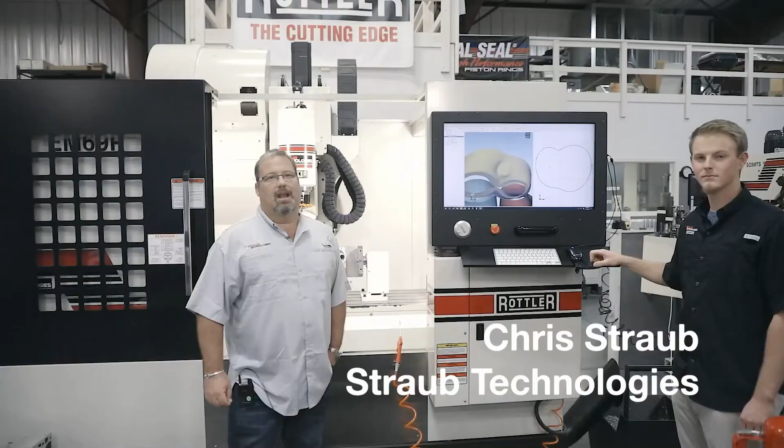Hi, I'm Chris Straub with Straub Technologies, and I'm here with Jaden McCurry. Jaden operates our EM69H Rottler CNC center that we use for porting. At Straub Technologies, we had come to a point where we needed something that could replicate the development work that we had been doing as far as cylinder heads. Asking a few questions of people, what CNC cell we needed to buy for CNC porting, one company kept coming up, and that was Rottler. One reason is because Rottler is a self-contained digitizing and machining center. Not only can we use the Rottler to do the machine work, but it can also digitize the part that we want to replicate in the machine.

Straub Technologies grew from my garage. Never thought that I would be doing anything like this. I've been in the industry for 25 years, but people now with the DIY mentality, they want to be that Grumpy Jenkins, that Keith Dorton type person and build their own motor. So with the Rottler, being able to produce over and over again the same quality part was important to me. I need to provide something for my customers, and that's what the Rottler machine allows us to do.

When I bought the Rottler, they came to me, and when in talks they said, Chris, you don't have to know speeds and feeds and all this stuff. The machine knows that. As long as you can work Windows, then you can become a CNC operator as far as doing port work and stuff.

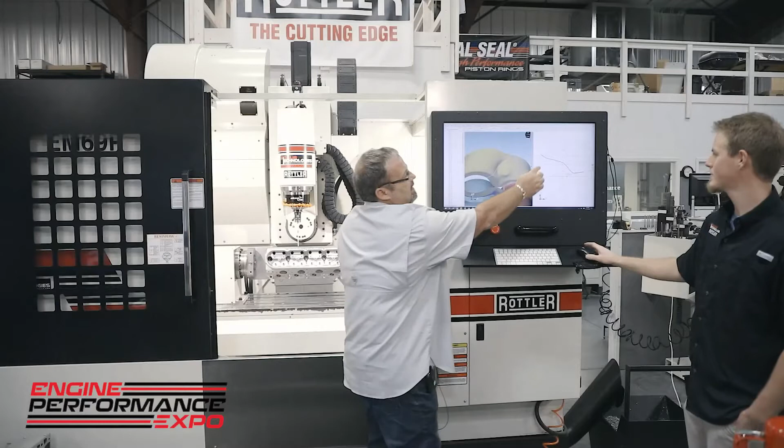So one thing that we do enjoy about the machine is the manipulation of any of the data points that Jaden is able to capture using the Renishaw probe on the cylinder head, easily seen here. And all of these lines represent captured data in the combustion chambers. Each one of these is where the probe has touched, so it's mapped out this combustion chamber of this cylinder head. And Jaden can then go into his computer system in his office, and anything that he needs to smooth or reshape is easily done.

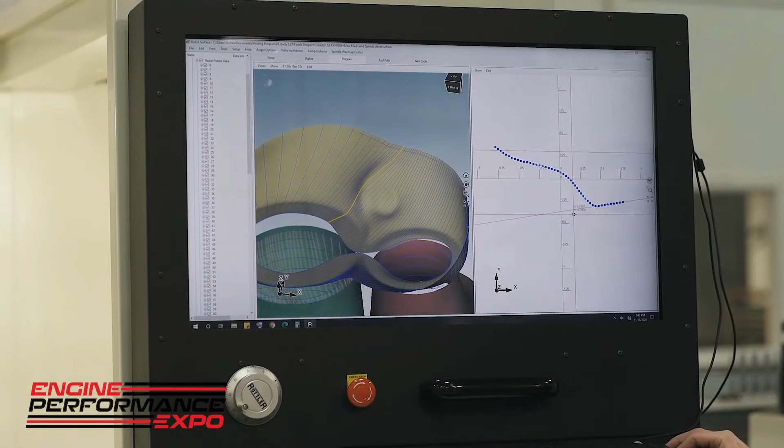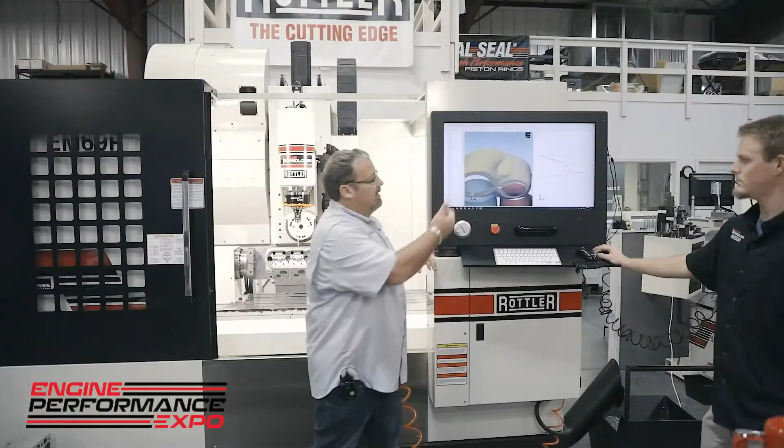That's one advantage the Rottler has over multiple machines, its ability to capture data so fast. You'll hear about people that have digitized over the years, and it might take them a week to 2 weeks to do an intake port, an exhaust port, and a combustion chamber. Jaden's been able to do this in a matter of a day. So what's important to me is I don't have to have as many people, but can produce as many parts as some other much higher volume shops. So for me, as a small business owner in the automotive performance industry, Rottler was my choice.

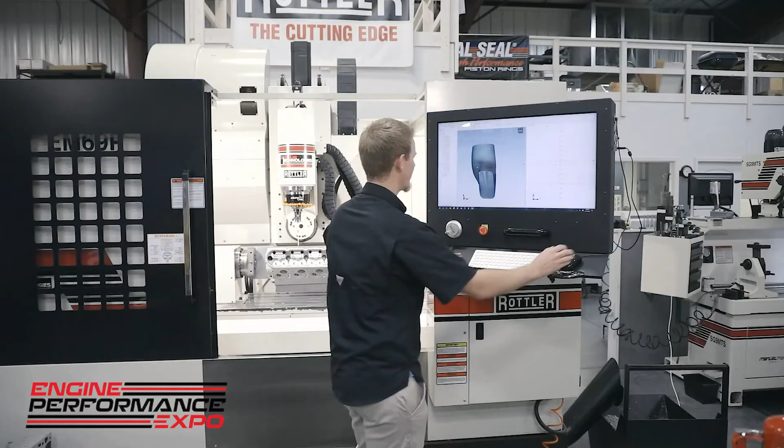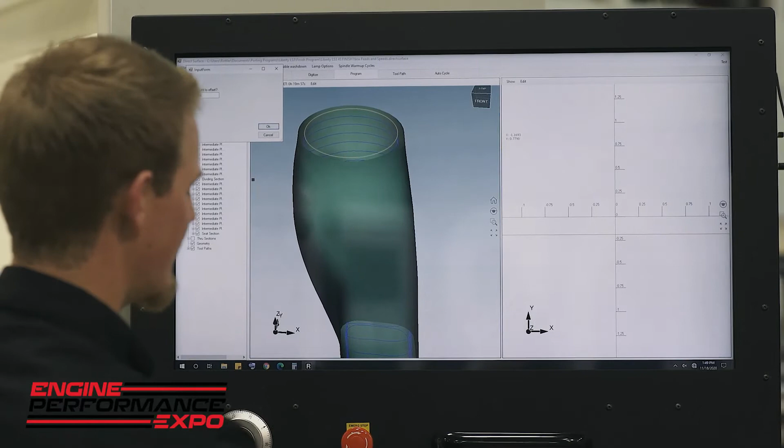Yeah, so this is a port that has already been digitized, and it's already got the through section, so it has its solid surface. If I want to go through and change, say, the plane that's right here on the seat surface, if I want to shrink this entire section, it's as simple as right-clicking on the plane. You can go to section offset. If I want to offset it, say, 250 thousandths, just so you can see what it does. You can see it blew that entire plane out just that quick. So every little change that you make on this thing, you can see all the results just about as quickly as you want to do it.

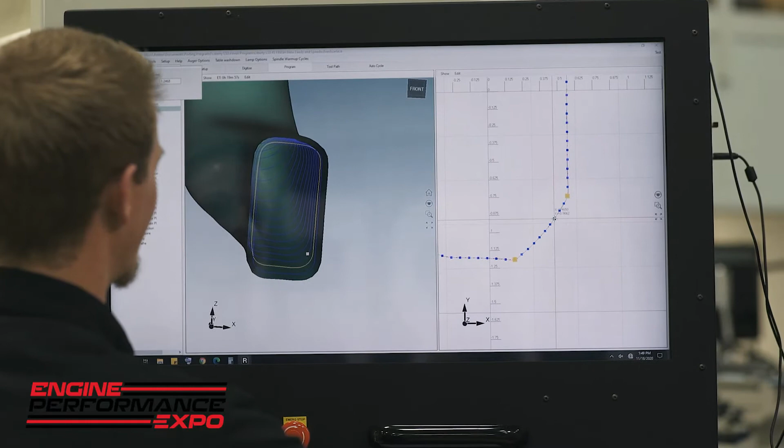So you want to change the radius in the corner of this plane. Click that, you can change your arc. So you just make it a straight line or whatever. And you can see it right there immediately as you do it. So it gives a really good representation as you go through if you want to smooth things. There's really not a lot of waiting to get things happy like you want it to.

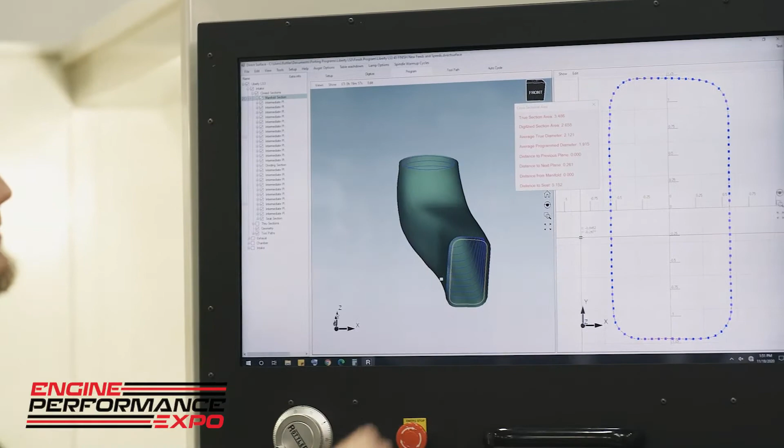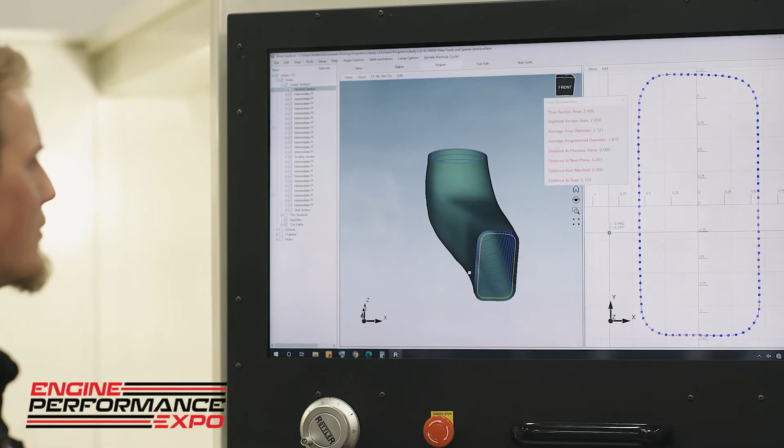But with each plane that you go through and digitize, which is what all these sections are with the data points, it keeps record of the sizes, so it's got its own little graph, like a little representation you can keep track of, and you can check out your cross-sectional areas. So you pull the list up, so this right here is the manifold section, the first section on the manifold side for the intake port. It gives you your true section area, digitized section area, average true diameters, program diameters. It gives you the distance between the planes. It'll tell you how far you are from this manifold plane.

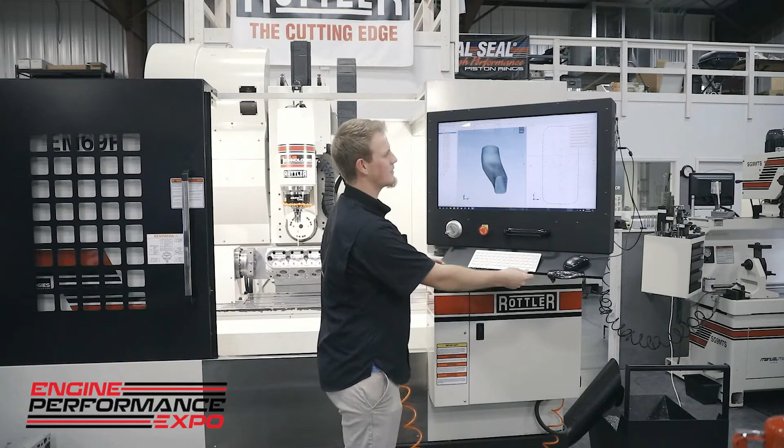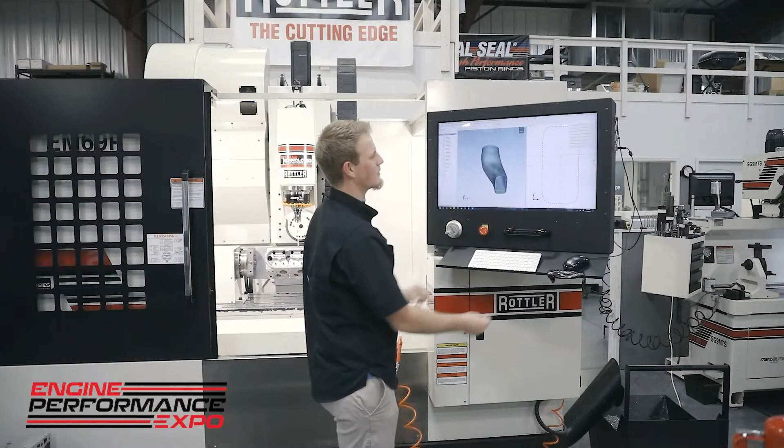So I'm starting right here at the manifold section. So right there it says distance to the next plane: you got 261 thousandths. If I go to the next one, it shows distance from the manifold, so it shows that we moved 261 thousandths. So if you pick a random plane throughout your port, it can give you an idea of a measurement, how far into that port you actually are.

Honestly, my favorite feature about this machine is after you've created your ports and you've got your tool paths created, it'll show you where your tool has run.

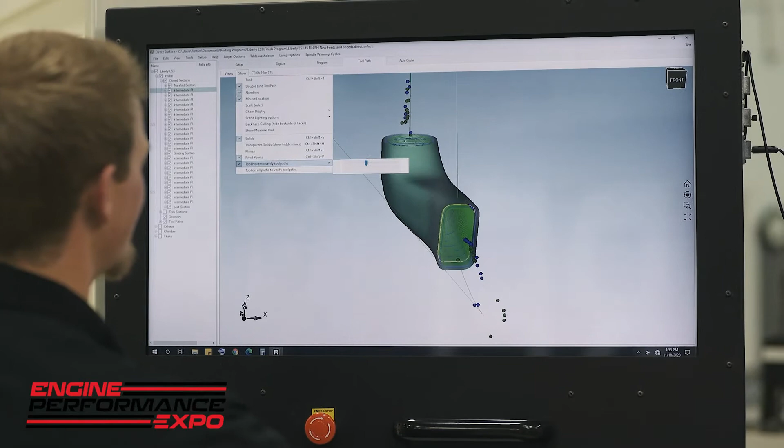And in previous updates, you can hover your tool and it'll show a rendering of it pivoting on these pivot points as it goes through the port. And with the more recent updates, you actually have a function and it will show you every spot that that tool moves throughout that port.

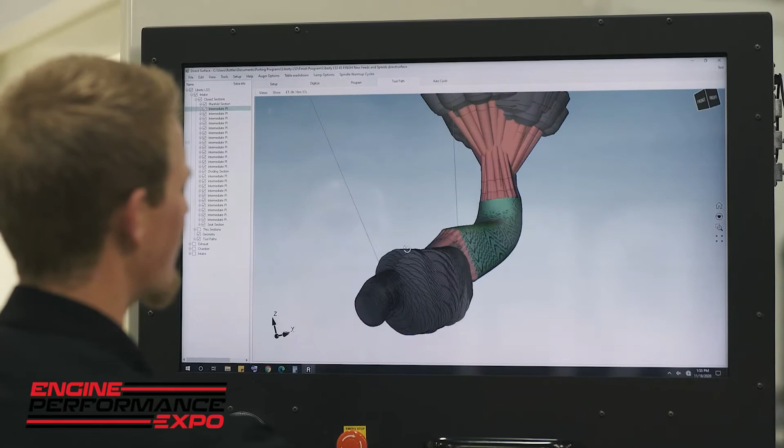And it's really nice because if you have long ports or ports that are making really sharp turns, if that tool is going to get down and try to rotate where it would actually dig into the opening surface, it'll show you that the tool will be poking through the side of the port. So instead of having to hover back and forth and hope that you catch it with your eye, or running it and just being really careful, you're almost guaranteed that you're not going to hurt nothing with that feature.

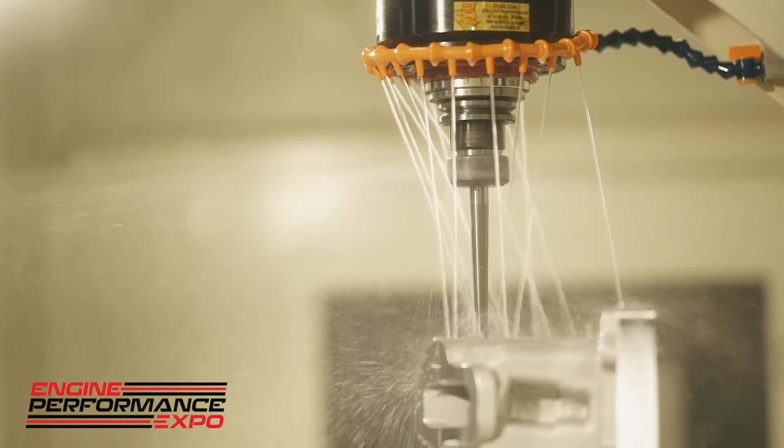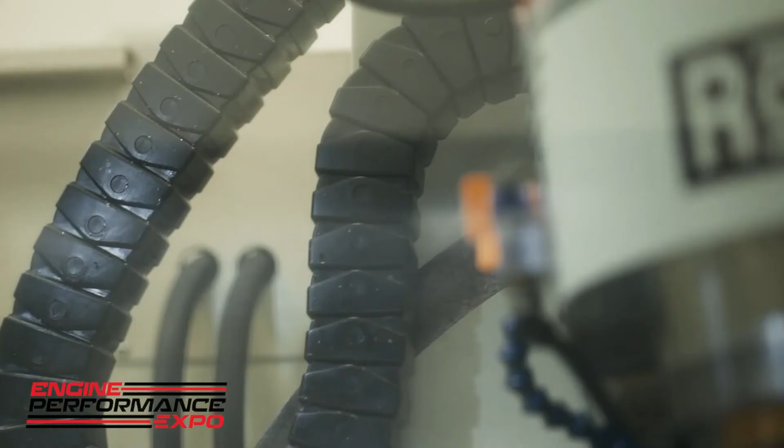Standing in front of our Rottler EM69H, it's a cylinder head porting machine. Years ago, we were all kind of talking about possibly purchasing a machine, because we were porting a lot of cylinder heads by hand, and it was taking just way too much time. Literally 8, 10, 12 hours or more for import heads and V8s. We do a lot of imports, a lot of domestic stuff.

So we looked at a bunch of different machines from a lot of different manufacturers. The Rottler basically stood out in front because it's an all-in-one type of machine. So we can hand port a cylinder head, get it on the flow bench, make little changes or whatever we want to do, get the head in the machine, actually digitize it in the machine, actually do all the modeling, solid modeling, look at how the port design looks, create all the tool paths, run little tool paths, make changes on the fly if you want, and actually port the head in the machine. It doesn't have to come in and out, in and out.

You know, stuff that used to take us, like I said, 8, 10, 12, 14 hours. Now with this machine, the CNC cycles are generally 2, 3, maybe 4 hours at the most. So you're definitely saving a lot of time.

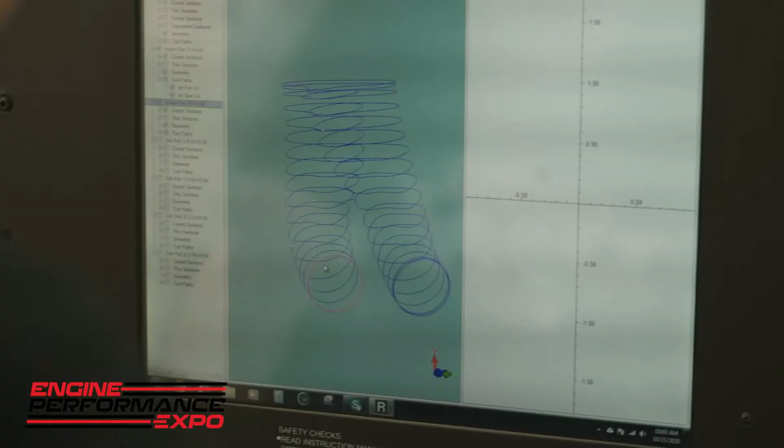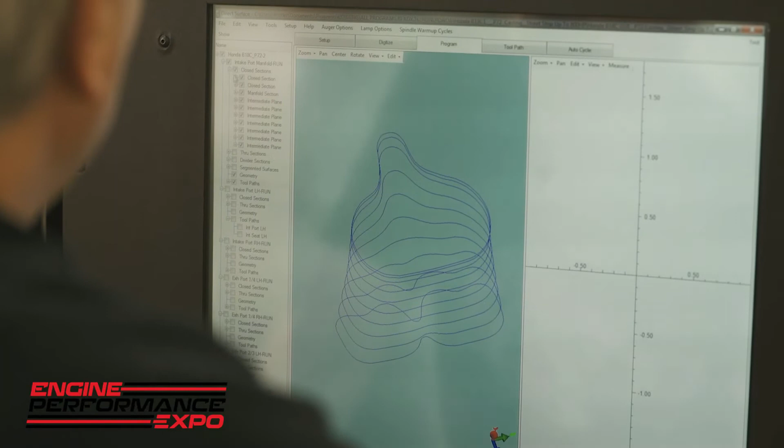Yeah, so basically with the Rottler software, after the head has been ported, you obviously put it in the machine and we start the digitizing process. The probe will come down and actually digitize each of these little pie slices, as we call them. So it's making a digital copy of what you hand ported.

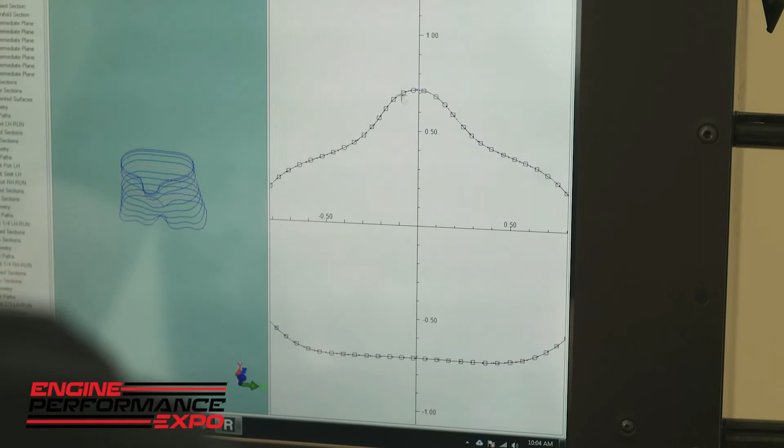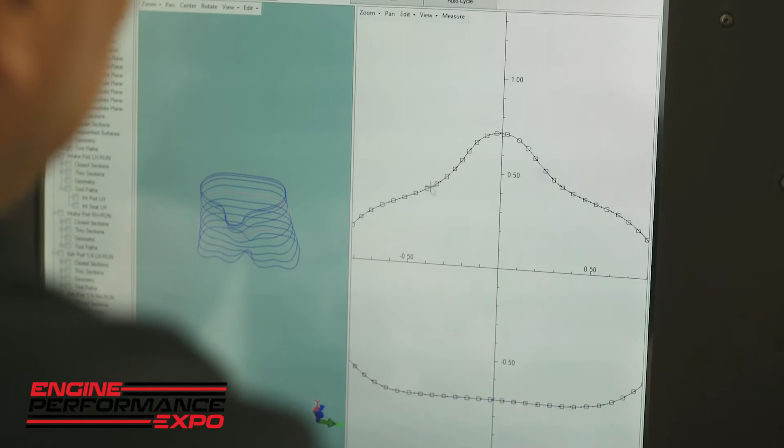And once these are all digitized, you can actually go through, and if you want to edit the shape of any of these, you physically can just grab any of these lines and points and move them. So if you don't like the way a curve is, or maybe the probe hit it just a little funny, or your port wasn't as perfect as you thought it was, you can edit it there. And then they have smoothing operations that will help smooth out the port and line everything up a little better for you. And it's all done on the machine.

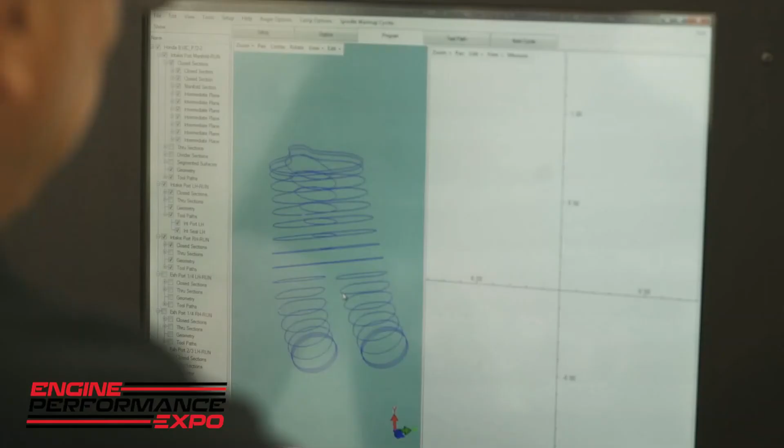And once you're done with that and you kind of like what you see, then you can actually start creating the tool paths. After it's digitized, if you have to make any changes, you can make your changes. You can click on any of these points. You can move stuff around. It has smoothing operations to blend the stuff a little better. Sometimes when you hand port, you think you have it perfect, but you don't.

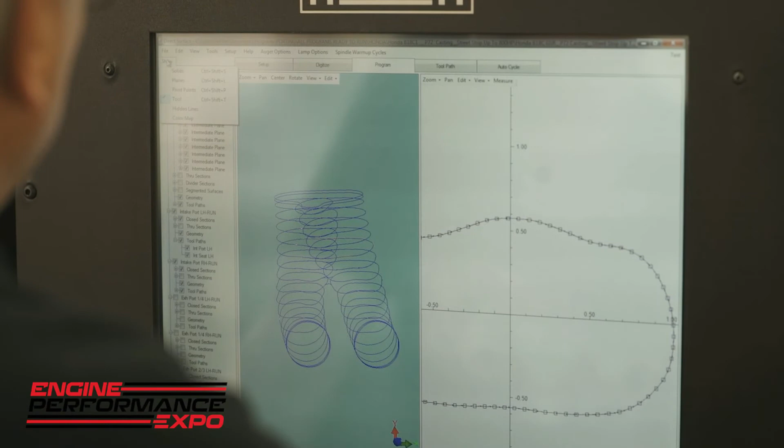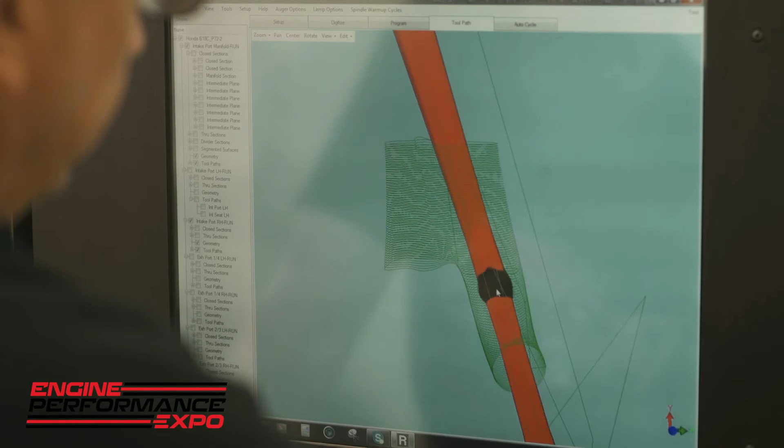So everything can be modeled and modified, and basically you can bring up a solid version and look at it on the port. So it's going to show you exactly what it's going to do before you actually start cutting the head. And you create all the tool paths. So basically all these green lines, this is what the porting tool is going to do, going through the cylinder head to cut it. And because it's saved and it's all computerized, it's going to repeat the same every single time.

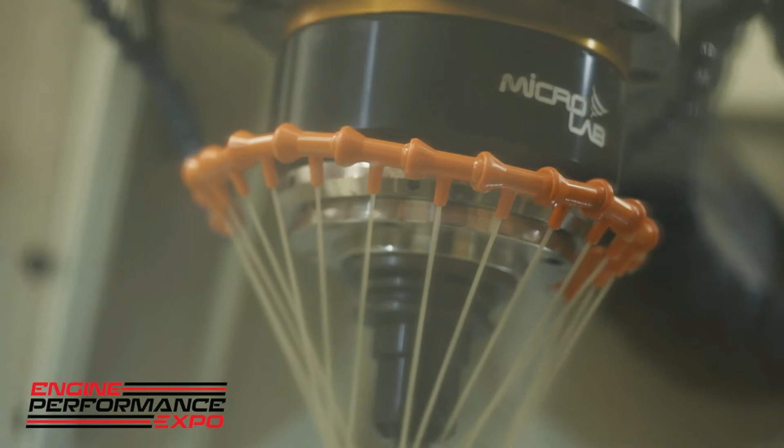We're not all about making the ports huge. We try to work with them, keep the velocity going and stuff like that. And with the turbo, you can actually CNC port the head, make more horsepower with less boost, which in the long run is going to actually help the engine. So you can have a little more streetable product. But if you do want to change it up, you do have the room to expand and pick up the horsepower level.

We're doing a lot of import stuff. Probably one of the hardest heads we started on and got trained on with the machine was the Subaru EJ series heads. Probably the hardest heads to jump right into. But we've got probably a dozen different programs just for all the Subaru heads alone, all the different castings and horsepower levels. We've got 400 or 500 horsepower street engines up to 1,100 horsepower all-out drag engines. And the sky's the limit.

The awesome thing about the machine is the repeatability. When you hand port, you can get tired, you can get sloppy. Like I said, the hours are just uncountable, but once the program is run, it makes it the same every single time. And if you do want to make a change, you make the change. If you like it, you save it, and it will do it the next time at the push of a button, basically.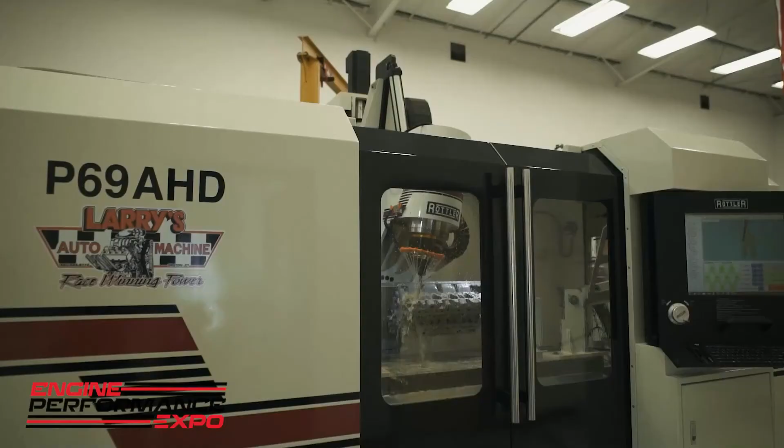We quite often get asked why we picked the Rottler over some of the other machines, and it's just we've had a relationship with Rottler with the other machines we've bought: the F68A, serial number 1, outstanding machine, our cylinder hone, the H85 seat and guide machine. But it's just the price for what you get is phenomenal.

My name's Brian Harrison. I work for BES Racing Engines. Worked for Tony for about 9 years. Been running these current machines here for about 7. We're here to talk about the Rottler P69. We use this machine to run numerous cylinder heads here at BES, and this is one of our heads, a pretty well-known popular head for Ultra Street. It's a high port Trick Flow small block Ford head.

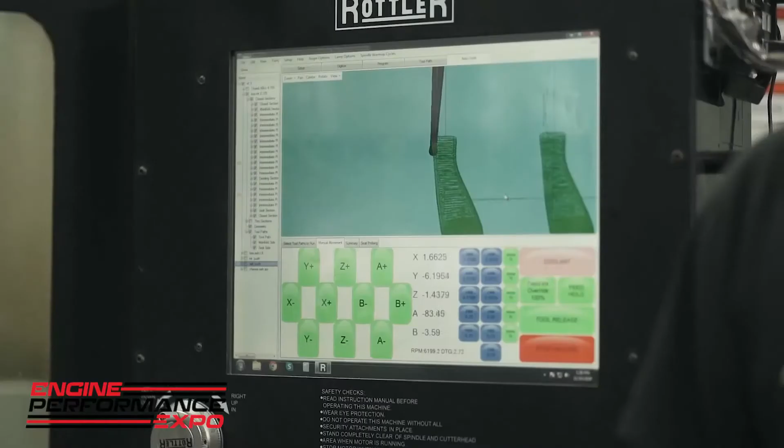We can run this whole particular head in roughly about 3.5 hours in this machine. Intake port, chamber, and exhaust port, and we also run our push rod clearance in this too. That's a nice feature to be able to do. This is an intake port. Sometimes we use different length tools because sometimes they chatter, just because of tool length, and try to cut more material out. We just try to cut as much as we can with our tooling.

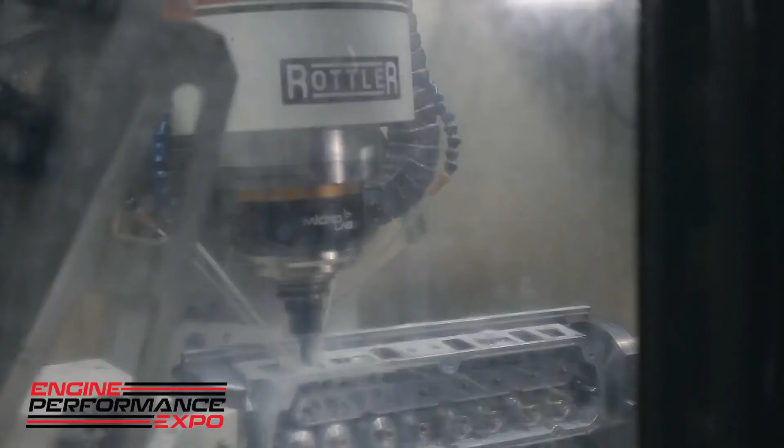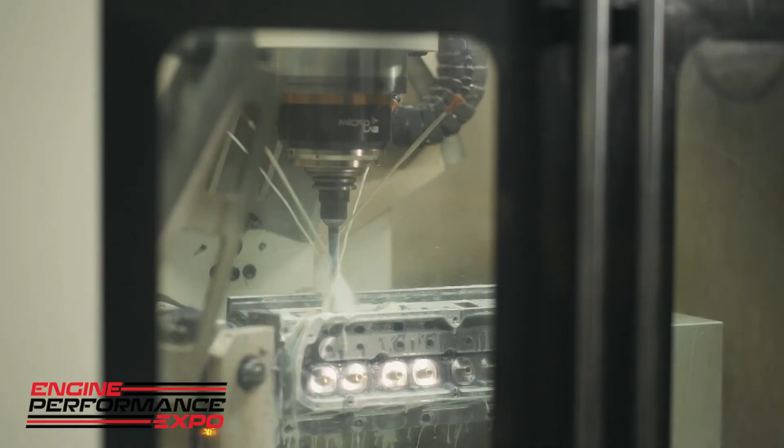Get a long tool like that, it's hard. This particular head here, we plug the exhaust bolt holes, then we face mill them, but I just do that manually. Just use a fly cutter and shave off the exhaust flange to make it smooth. We go to roughly about the center of the short turn to keep the tool from shanking out, which on the long side would be just a hair below the valve guide typically, kind of where I shoot my line of sight here. I can kind of show you here.

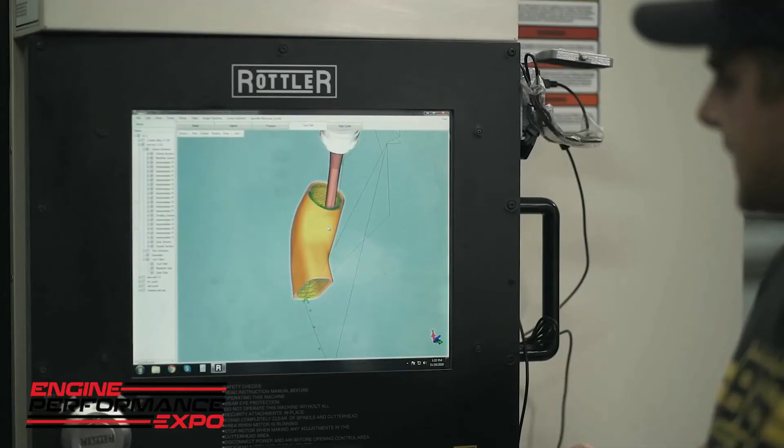This is our tool path here. Being able to bring up the tool path helps out a lot to save time from trying to dry run something, to make sure the tool's not going to crash. It definitely helps in a lot of different scenarios. Rottler, especially in the cylinder head department, built a CNC machine that was that fast digitizing. It used to be, when I bought that machine, for most guys it took a week to digitize a cylinder head, intake, exhaust, and a chamber.

And with Rottler stuff, you can mess around and get it all done in 8 hours easily. My guy's been doing it for quite a while, and he can do it a lot faster than that now. It's very user-friendly. It allows somebody that's not a machinist, somebody that's not trained to be a machinist, to get in there in a couple days with training. You're porting heads. You're ready to go.

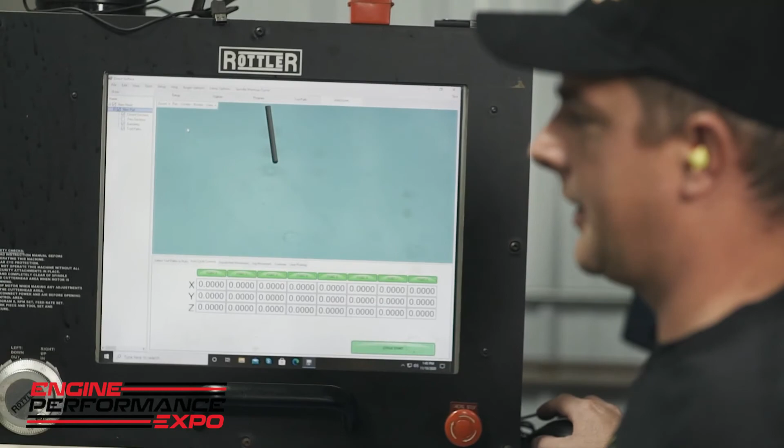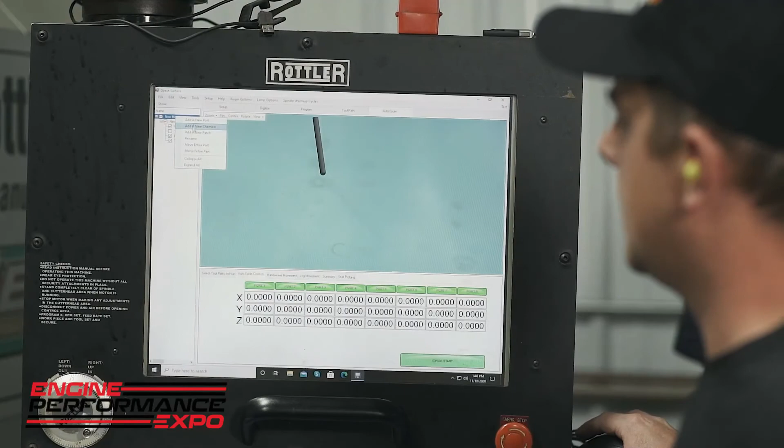So with the P69, we have the Renishaw probe. So we can basically just go in here and click on, bring up a program, make a program, click on here. You can add ports, chambers, you can do patches. But anyway, I brought up a port here, just like an intake port. So basically you would want to start the port on the intake manifold side. We've got to develop planes to digitize to create a port.

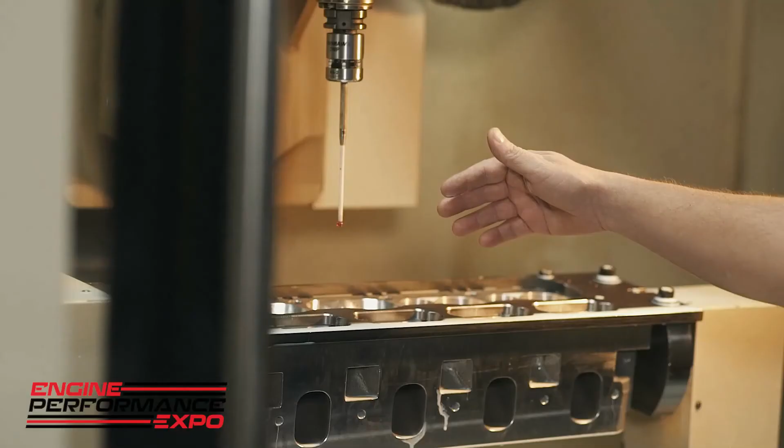And you can do all that and roughly do all the digitizing itself and creating tool paths all within about an hour and a half to 2 hours, according to what kind of intake port you have. It saves us a lot of time over doing something like that by hand. To be able to come in and do that for the engine building side of it to get the job done, couldn't even say how much time it saved us, but it's an enormous amount of time.

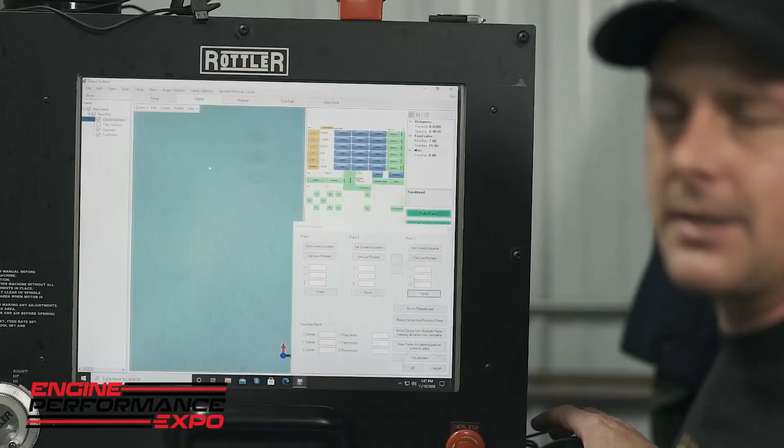You can digitize a chamber in probably an hour 15 minutes to an hour and a half to get it ready to run also. Say you have a port created, you can go in here and you can just manipulate a port, so you can move the whole port X, Y, or Z. You also have a blend deal for the tool path to make it smoother.

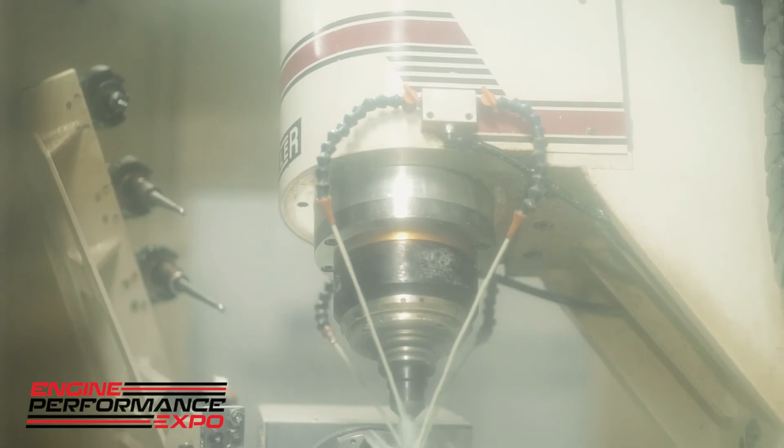We run about a 30 to 32 thousandths step over typically on a finished path. So like say on our OEM stuff, the guys don't even have to blend them. I digitize a little area on our OEM stuff because it's so consistent, so the guys don't even have to really blend it. So it works out really nice, saves a lot of time. Just blend out one bowl and just digitize that little area where you would do it by hand. And sometimes you got to play with the size to get it to where it don't cut too big or too small, but it works great.

So mostly we do all of our digitizing in this machine here, really for no reason other than we just try to keep all of our new data in one machine. So you can just take basically a flash drive, and you just hook it in and get your data on a flash drive, then you can just transfer it to the other machine.

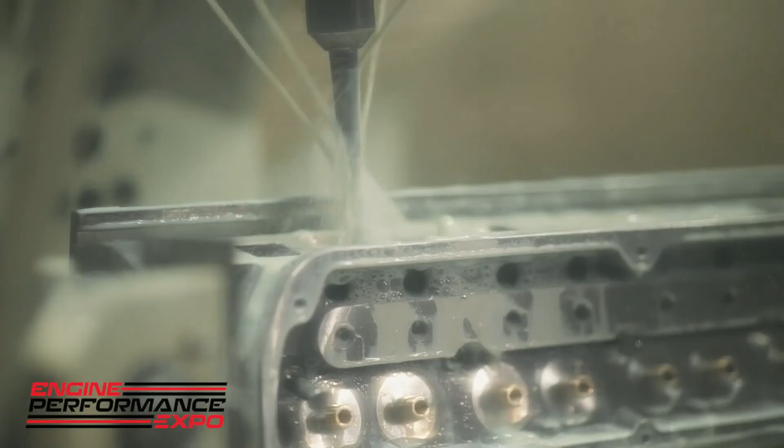The Rottler cylinder head machine definitely made it profitable for us to do one-off cylinder heads and CNC them, and that's a huge help because we do mainly one-off engines, so we don't do a lot of cookie cutter stuff that you can afford to pay somebody a week to digitize ports for you and stuff. This really upped our game.